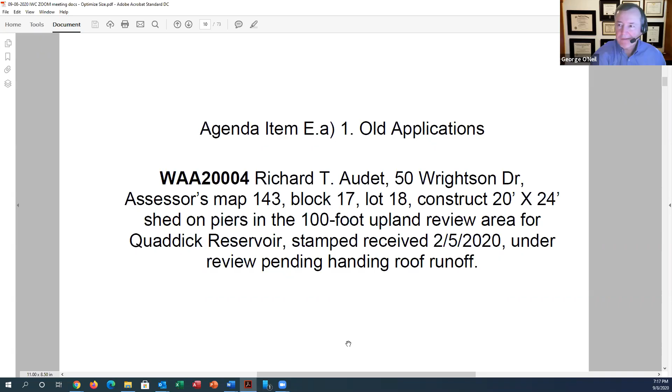So Mr. Audet did get his NDDH approval, and he's been working on getting the roof runoff handled. Just today, he submitted some details about an articulating concrete block for use to keep the top of slope stable. He sent me some photographs today also. These, of course, are not shared with you. I expect that once he modifies the plan to show where he wants to put this articulating concrete block, then I'll move forward with approving the application. But I don't have his revised drawing yet. So I'm waiting for a revised drawing for handling of the roof runoff. I see. Any further action required then? No, not at this time. All right, moving on to the next item.

We have WA 20009, Hallett, Merrick, Plum Road, Assessors Map 85, Block 52, Lot 12, construction of a single-family home, septic system, and portion of a home proposed in the 100-foot upland review area, stamped received on 4/13/2020, under review pending receipt of additional information.

This application is being handled by Bruce Woodis of KWP. I believe he has been on the screen; I see that he had logged in. He's working on developing a revised plan and expects that it will be submitted in the next week or so. Once I have that additional information, I'll be able to determine if I can issue a wetlands agent approval on that. I see. So I'm still awaiting a revised plan.

Okay, no further comments on that? Moving on. Am I out of order here? That's 9. Okay. Yes, you are. Okay, now we're up. Which one? To be on James Jasmine. That's it, right there. All right.

So the next item is item 3, IWA 20011, James Jasmine, 518 Brady Hill Road, Assessors Map 143, Block 16, Lot 37. An after the fact application for partial demolition of retaining wall and construction of a new retaining wall and Quaddick Reservoir. Stamp received on 5/6/2020, statutorily received on 5/14/2020. What do we have on that?

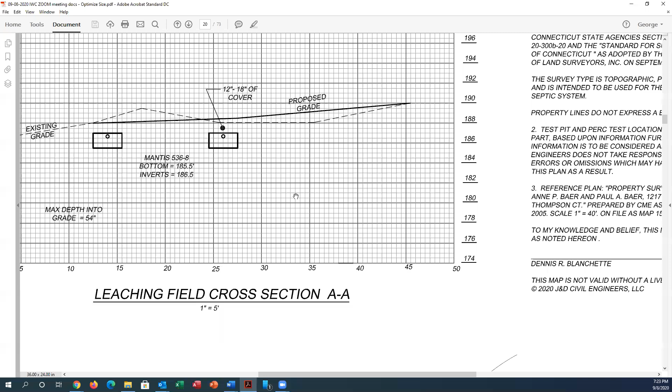Okay, I would like to preface this that there was a letter sent out on August 21st to Daniel Blanchette identifying a number of issues that I had. There's a copy that was sent on the Zoom documents. Subsequent to that, I received electronic versions of revised plans dated revised September 1st. The hard copy of those plans was received on September 4th. So the electronic version that you see of the plans is what I received electronically from Daniel Blanchette, and they appear to be the same as what I received in hard copy.

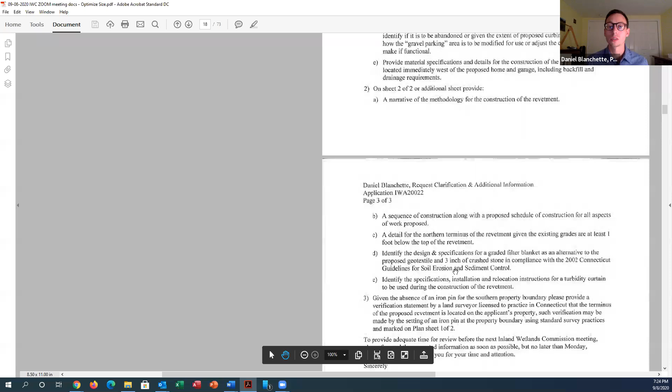All right, we have that displayed on the screen. Maybe the easiest thing would be for Mr. Blanchette to go down through the request for clarification and additional information line by line, and just to verify what changes he made to the plan so that you are aware of what those changes were. Okay, Mr. Blanchette, are you available on the call? Yes, I am. All right, so perhaps for the record, if you would state your qualifications, your role here, and maybe you can address the questions that the wetlands agent posed.

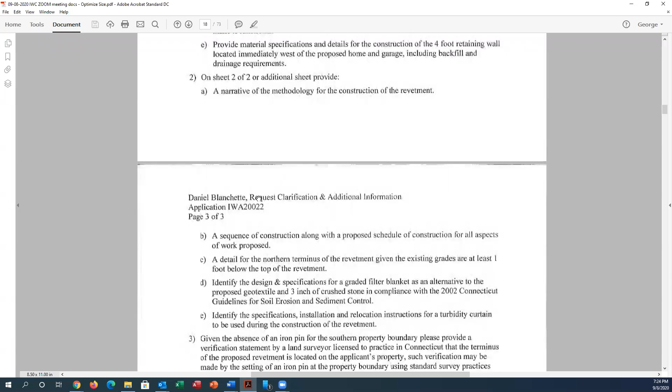Of course. Good evening, everyone. My name is Daniel Blanchette. I'm a professional engineer in the state of Connecticut. I work with J&D Civil Engineers out of Thompson, and I'm here on behalf of my client, Mark Baer. So just to run through the letter that's before you with some of Marlon's questions or suggestions. 1A, we have identified the limits of land disturbance. On the first sheet, there's a dashed line that kind of shows the extent of the grading.

If you're not speaking, please mute your mic, because we're getting a lot of feed over here. Thank you. I'm sorry, Mr. Blanchette. Please proceed. Thank you.

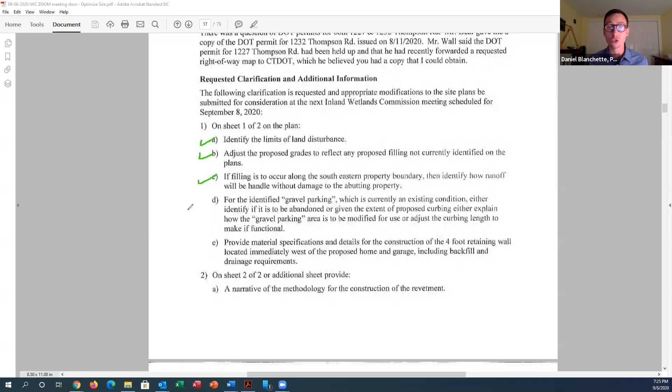1B, adjust the proposed grades to reflect any proposed filling not currently identified. I did address this. This is, I think, in response to the southern border of the property. The homeowner intended to do a little bit of grading that I wasn't aware of previously, so now we're showing that on our plan. So that leads into 1C, actually. Again, doing a little bit of grading and filling along the southern border. I don't expect the drainage patterns to change from what's currently there. A large portion of the southern boundary has kind of a steep natural swale, or a little valley, and so we'll be filling that a little bit, but there still will be a subtle swale there. So that should prevent any runoff from entering the neighbor's property.

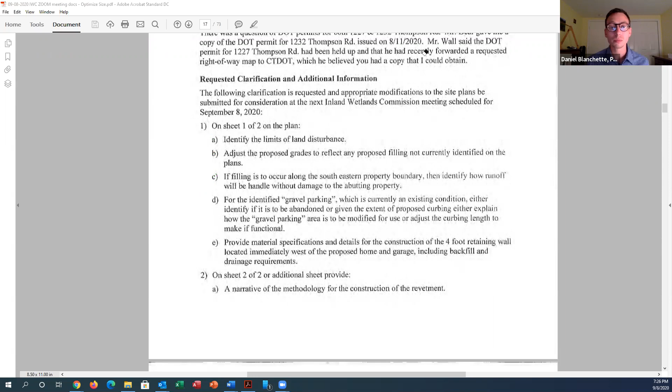I almost feel I should jump down to your notes here, right? Is this where you're referring to? Yep, exactly, kind of in the lower right corner. A little more to the right. Yeah, right there. So you can see there's a natural depression there. We're gonna raise that a little bit, but there still will be a depression. Okay.

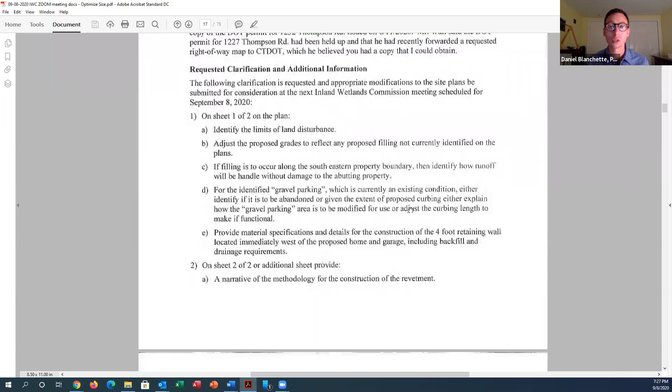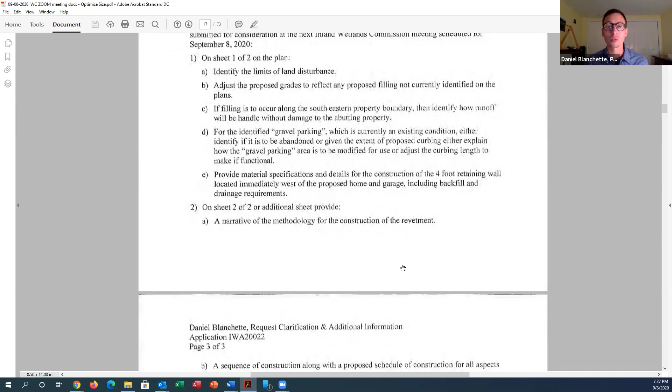1D, for the identified gravel parking, identify it as to be abandoned or modify the curb. We do want to keep that gravel parking area, so I pulled the curb line back a little bit. Otherwise, it's going to be left alone. 1E, a detail for the retaining wall. That's shown on sheet 2 of my site plans. All the retaining walls will be substantially similar. They're constructed from what's commonly called mafia blocks. They're large 2-foot by 2-foot square concrete blocks that have a groove on the top to lock together. So we'll be having 2 courses of that for the retaining wall. There will be a perforated pipe behind it to provide drainage. And again, a detail is shown on sheet 2.

We should almost have a side-by-side on these things, but we aren't there yet. Or we can do it on some platforms, not on this one. All right. A lot of scrolling, I know.

Okay, where are we here? The mafia block is right there, yep. Got it. Right there, just uphill of the house. And then if you keep scrolling down to the second sheet, you can see a detail a little bit up and right. There it is, concrete block retaining wall detail.

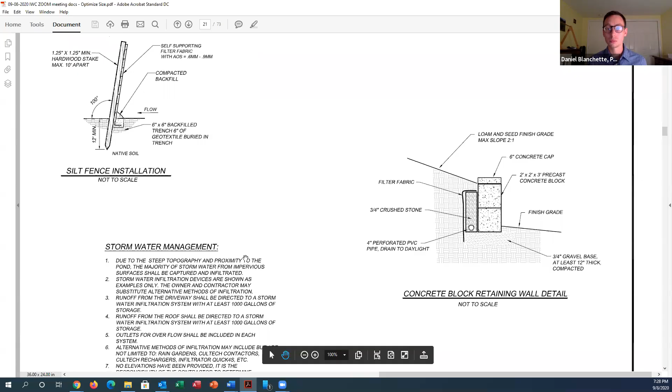So just to clarify, Daniel, there are actually 3 concrete block retaining walls. One is to the west of the house, and 2 are to the east of the house on the pond side of the house. And the purpose of those retaining walls are what, Daniel? The purpose is to prevent erosion and to make the lawn a little bit flatter and more user-friendly for my client. While we're on that topic, if you want to scroll up a little bit to my larger cross section.

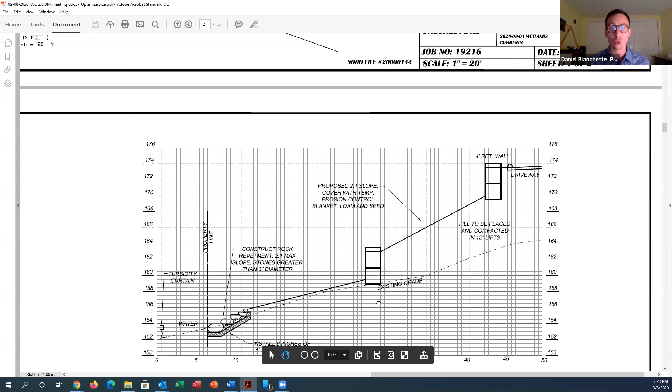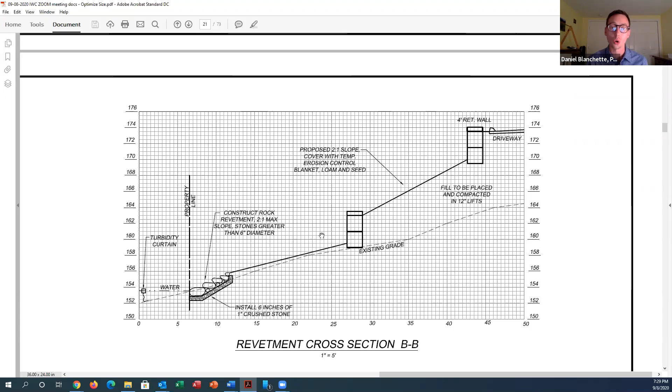Is that it? Yep, that's it. Now previously we were proposing a continuous 2-to-1 slope from the driveway down to the water. There was a lot of fill. And now this second retaining wall that we've added closer to the water allows us to leave the shoreline largely unchanged. There's very little filling or modifications to the first 15, 18 feet along the shore. You can see there's only a few inches of fill proposed, basically just to level it out and provide a nice lawn surface.

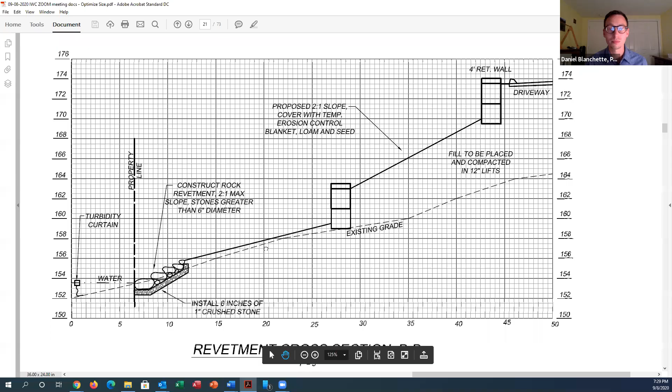Okay. And then afterwards, the second tier is a little bit steeper and requires a couple feet of fill. All right. Are there other points on your checklist there, or did we cover them all? Nope, I'll continue. Stay on this sheet, please, if you don't mind.

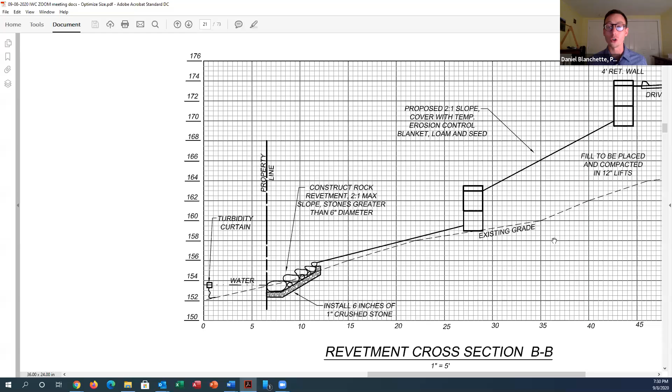Certainly. Marla's next comment was to provide a narrative of the methodology for the construction of the revetment, which is also provided if you scroll to the left a little bit. I have some notes talking about how that's going to be built. We're going to start at the north end of the property and work our way south. We're going to try and construct this in sections about 50 feet at a time, a couple 50-foot sections.

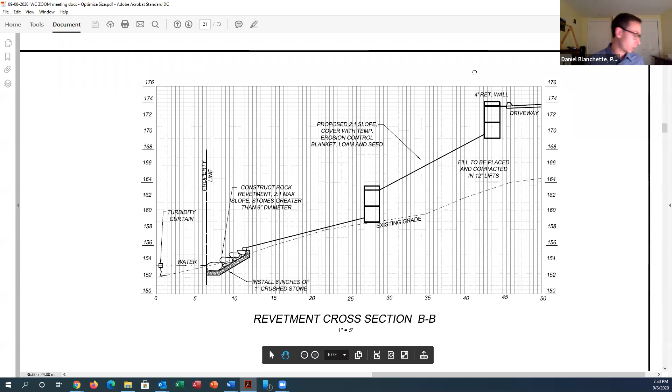And on the larger, nope, sorry, it's on the second sheet. Second sheet. Is this the second sheet? That's first sheet, sorry. Okay, let me go to the second. Yep, right there, up, left. Right here, left? Left. There it is, further left. Construction sequence for revetment. Oh, there you go.

Okay, got it. So I spoke with the contractor at length. I think we came up with a strategy that works. And that also kind of leads into the next comment, which was a sequence of construction for all aspects of the project, which is provided just below. It talks in general terms about how the project will proceed.

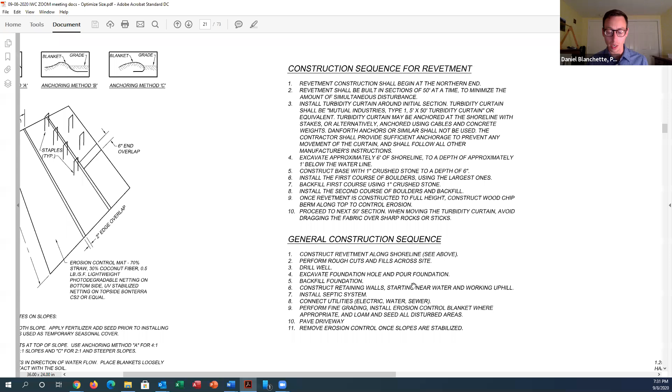The next comment: identify the design and specifications for a graded filter blanket as an alternative to the proposed geotextile used on the revetment. So again, if you could scroll back to the revetment cross section. Previously, we were proposing 3 inches of crushed stone along with a filter blanket or a geotextile fabric. In speaking with Marla and the contractor, they feel that due to the size of the stones that we're placing, the geotextile could get torn.

So what we've decided as an alternative is to double up the crushed stone and get rid of the geotextile. So now we're proposing 6 inches of 1-inch crushed stone as a bed for the larger blocks that will compose the revetment. Next comment,

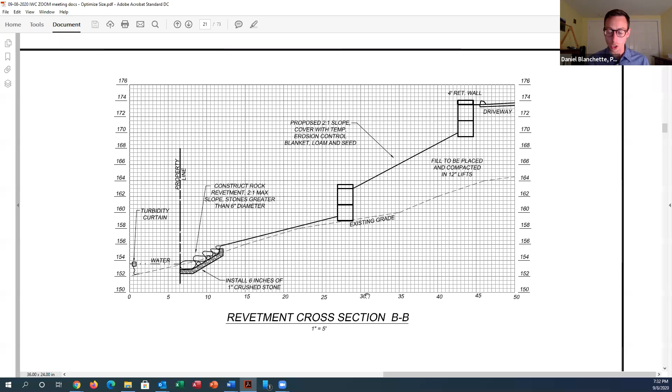2E has to do with the specifications, installation, and relocation instructions for a turbidity curtain to be used out in the water. Previously, we had proposed either some staked straw wattles or straw hay bales, but due to how rocky the bed of the lake is at that location, we felt that stakes would have a tough time really working. What we're proposing instead is a turbidity curtain.

If you're familiar, it's basically a float, a cylindrical or square float that floats on the top of the water, and there's a blanket or a fabric that hangs down into the bed of the lake that prevents any kind of silt or erosion from contaminating the larger water body. So we will have this turbidity curtain. I sent a specification to Marla for the type of turbidity curtain, the manufacturer.

It's a standard type 1 turbidity curtain, which is what's commonly used for water with low velocities. So it's not something you'd use on a river or on the ocean, but for this use, it should be sufficient. And then again, going back to the notes on the revetment construction, that has notes built in about the type of turbidity curtain, how to provide anchorage to the shoreline, how to move it, etc.

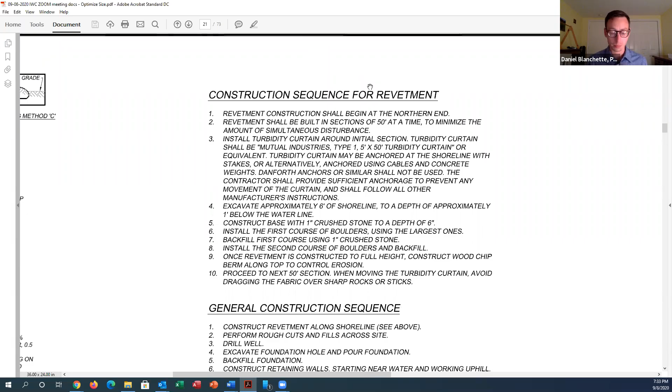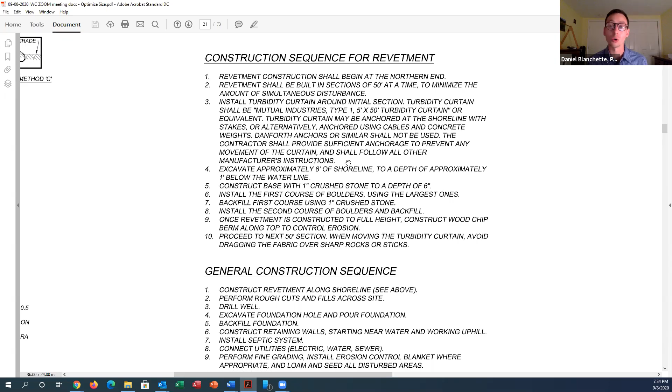Coming down to, I believe, Marla's last comment, number 3, there was a concern that the contractor might not know where the property line is and could encroach onto the neighbor's property. I explained to Ms. Butts that there is an existing fence that's right on the property line within an inch or 2. And so I think that's sufficient monumentation to prevent any encroachment onto the neighbor's property.

I believe that's all of Marla's comments, and I have addressed them. Thank you. Just a last point, I'll add that we did receive our NDDH approval. That letter was given on September 1st.

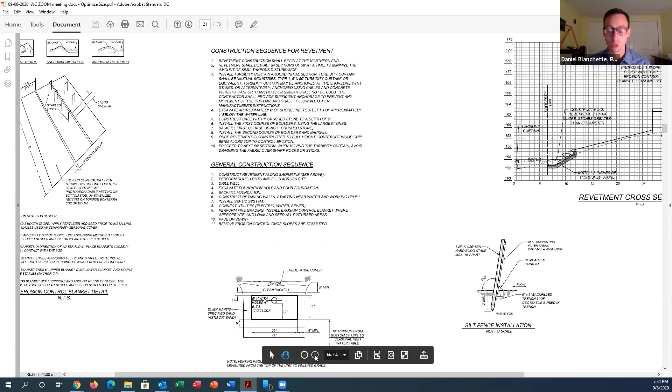Okay. Ms. Butts, is there anything else that needs to be addressed? So virtually everything that I had on my list was addressed. The only thing that I would come up with is if you go back to sheet 1, where you can see the revetment and the retaining wall. The revetment, according to the sequence, gets constructed first.

And then they talk about excavating for the foundation and then building the retaining walls after the foundation is excavated out for the house. The only thing that, in looking at it now tonight, I see that probably should have been added was once the revetment is completely constructed, a silt fence should be installed at the uphill side of the revetment, because the rest of the site is going to be potentially disturbed and could drain down into the lake over the revetment. Although it would have to go through the revetment.

Go ahead, Daniel. Sorry, I didn't mean to interrupt you there. I can address that. And actually, if you look, I have a note specifying that a wood chip berm is to be constructed at the top of the revetment. This was a suggestion by the contractor as kind of a free, environmentally friendly way to prevent any erosion. So that's what we were specifying in terms of silt fence, but we did have some erosion control in place.

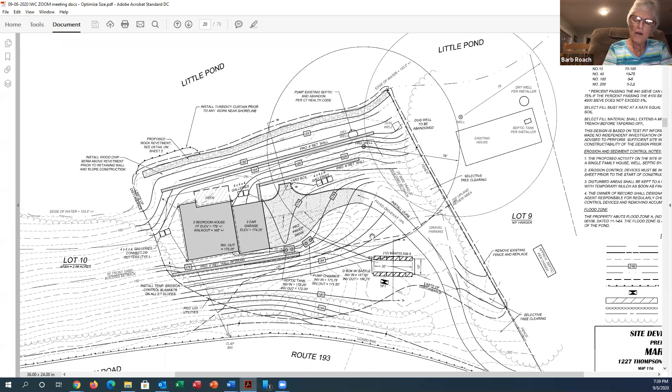So there were a number of questions and concerns during our last commission meeting on this application. Do any of the commissioners have questions of Mr. Blanchette or of Marla regarding the Mark Bears application? Barbara Roach here. I have a couple questions. Sure. Firstly, how far will the turbidity curtain go into the pond from the water's edge? It may say it in the instructions, but it's kind of small and I couldn't see if it did.

So the turbidity curtain that we're specifying is 5 feet in height, so it can be installed at a depth of up to 5 feet. I suspect the contractor, for convenience, will want to install it at a lesser depth of maybe 2 to 3 feet. 2 to 3 feet in height, or 2 to 3 feet into the water? In height. So maybe 5 or 6 feet into the water. Okay.

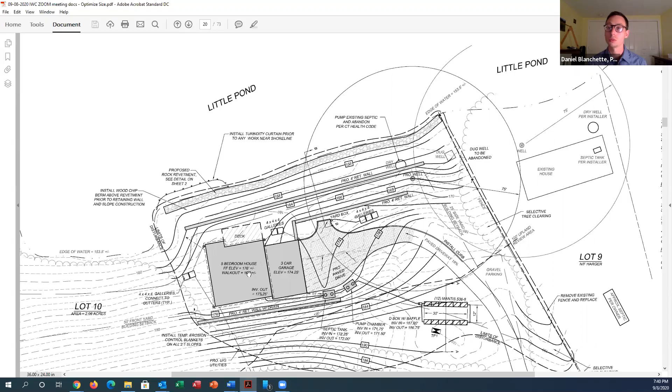Barbara, maybe I can help to understand this. Turbidity curtains typically float; the top of the float sits on the top of the water. The curtain is pretty impervious and sits down, and in this case will probably sit on the bottom, so that if there's any turbidity that's generated that gets into the water, it stays behind the curtain. And then once the work is done and the water settles out, the curtain is moved to the next location where there's going to be some disturbance and turbidity.

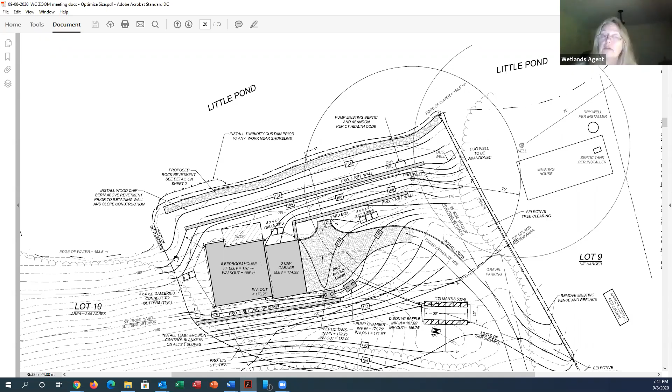It's intended to keep the sediment close to the site of construction and not allow it to go farther into the lake. It's not to say that there won't be any sediment that enters into the near shoreline. It just controls it and keeps it very close to the shoreline and not migrate out into the rest of the water body. Okay, Barbara Roach. So we could expect 5 to 6 feet of sediment from the edge of the shoreline into the pond till it gets to the turbidity curtain, correct? Correct. Am I getting that? Okay, yes.

I'd like a point of clarification. Charlie Obert here. What I just heard Commissioner Roach say, 5 to 6 feet of sediment, but is it actually a fairly thin film of sediment that may be up to 5 feet away from the shoreline and below the surface of the water, but it's not going to be 5 feet deep, is it? No, no, it'll just be a thin layer of sediment that's naturally disturbed from excavating the shoreline. There won't be fill per se in the lake. Okay, that's what I thought. Thank you.

Barbara Roach, one more question, Daniel. Will additional rocks be required? There are a lot there now. Will more need to be brought in? I'm sorry, the rocks for the revetment? I'm not sure if they need to bring more rocks on site, I'm sorry. Okay, thank you.

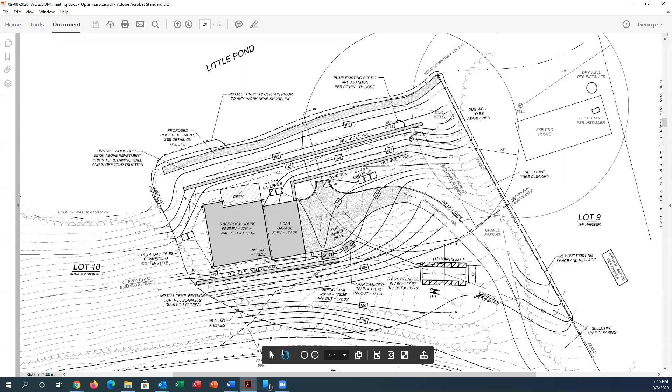All those in favor of approving the application, please signify by saying aye. Aye. Aye. Aye. All those that are opposed? All right, there is no opposition. The application IWA 2002 with the qualifiers has passed and the permit's approved. Thank you, everyone.

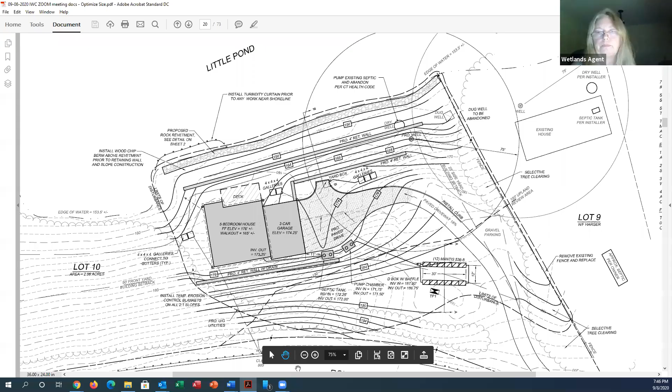Thanks, Dan. Just for the applicant's information, I will draft up the permit for George's signature. Once George signs it, it will be mailed out by certified mail to the applicant with copies going to the appropriate entities. Thank you, Marla. Moving on to the next application.

NDDH approval. All right, the next item. There are two items here from the same site. So should we look at them in total, or should we just read one and modify it? But it's IWA 20023, Thomas Murray, 0 Sandam Road, Assessors Map 114, Block 24, Lot 60B. Discharge of footing drain associated with the construction of new single-family homes, stamped received on 6/18/2020, under review pending receipt

of additional information. This is an old application, and would it be inappropriate to include both of these? I'd like to just say ditto. It would be appropriate. They are two adjoining lots. Right, so the comments that I have on both of them are the same.

Right. So there's also lot 60C, the same essential elements, to construct a single-family home, driveway and footing drain, portions of which are located in the 100-foot upland review area, stamped received on 6/18/2020, under review and pending receipt of additional information. So those are the two items on Sandam Road for Mr. Thomas Murray. So where do we stand on this one?

Or these two? We got a letter, well, actually, the engineer, Bruce Woodis, got a letter from the Natural Diversity Database dated July 26th. And in that, they stated that they reviewed their database files and the maps that he supplied for the two homes. And according to their records, they have a significant natural community identified as a poor fen and multiple state endangered and threatened species just downstream of this property.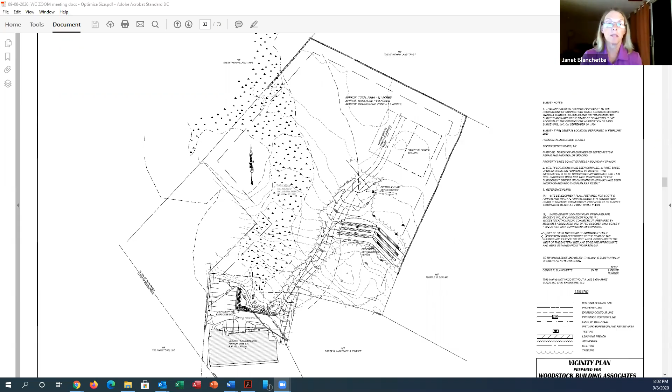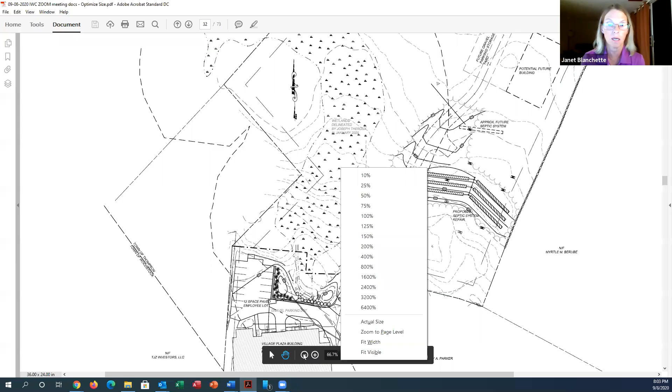Yes, so this sheet pretty much shows the whole property. You're probably all aware of the Village Plaza on Route 131, 171. Woodstock Building Associates is renovating the whole plaza to move their headquarters there. Right through the middle of the property, flowing from north to south, is an intermittent stream that is culverted under their back parking lot. And the whole back parking lot today is gravel. And there is a septic system for the plaza back there, which was failing. So essentially this is a whole renovation project.

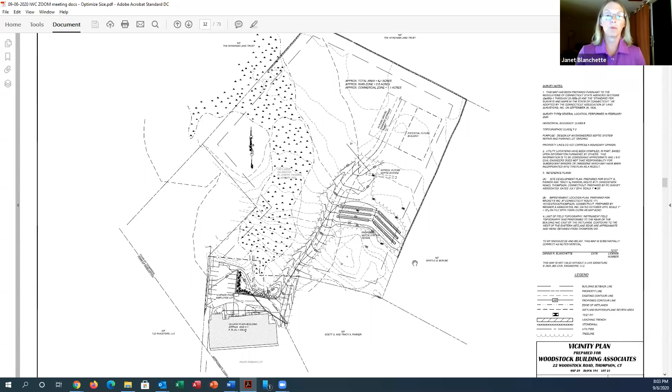Perhaps if you could go to the next sheet, page 33, Mr. Chairman. Yes, so this is a blow up, just larger scale of the area behind the building. There'll be a driveway constructed to the north with a new pumped repair septic system. And you can see there's a dashed line, right where your little hand is, which represents the 100-foot upland review area, correct. And above that to the north is where the repaired septic system will go. That's correct.

Basically the whole back parking area is within the 100-foot upland review area, and it's currently uneven gravel. So to create an attractive and safe parking lot for the employees, they would like to pave that. The drainage for that paved parking lot, and for the rooftop runoff from the building, will all flow into rain gardens or stormwater infiltration basins. So there won't be any direct discharges to that wetland or the downstream water course.

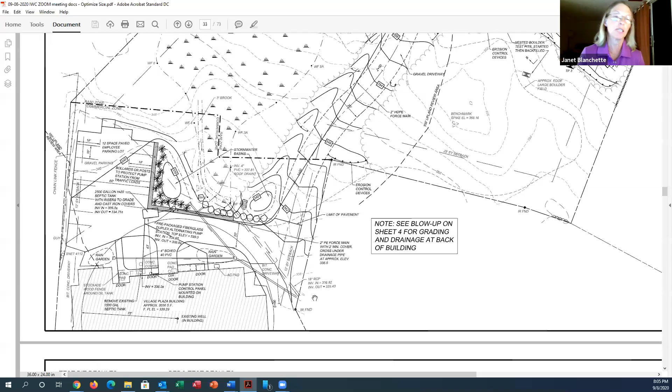The first option will be the infiltration through the low impact development features. And then as they fill up, there'll be overflow catch basins in each one of them that will flow. Yep, those are the stormwater infiltration basins, and lower down you can see two rain gardens that will take the roof leaders. And those will be piped to the outlet end of the existing 18-inch RCP. So technically on this application, there isn't work within the wetland, but clearly the work is going pretty much right up to the edge of the wetland in the vicinity of the parking lot.

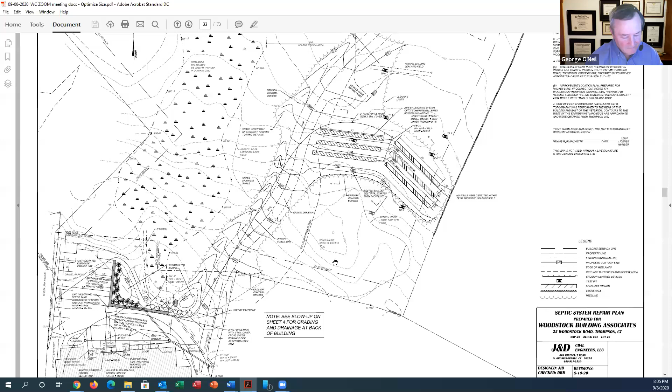So for the commission's benefit, the features that have been placed in to manage the stormwater that were seen on sheet 2, which is page 33 of the Zoom documents, are actually a significant improvement over what is currently there. The reason why the application is before you and not before me is because at last month's meeting, we converted it into an individual permit due to the direct discharge into the intermittent watercourse from the stormwater management system, where the discharge is at the outlet of the existing culvert.

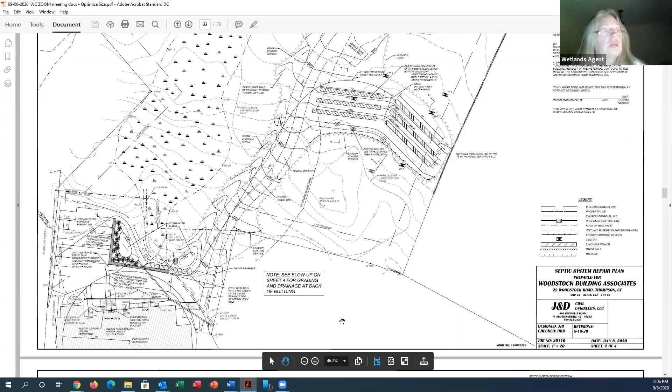And you can see that in the lower central portion of, where your hand is moved to the left. Yeah, I'm trying to make it larger. How's that? My screen works a lot slower than you guys.

In any case, all of the erosion and sediment controls that were identified on here should actually improve the runoff coming from this site. And the fact that they have a relocated septic system will also be of benefit because the existing septic system is not adequate. So there was nothing in this application that would warrant a denial. In fact, I think the design is very good.

If you have any interest in looking at stormwater management basins, there are some at the YMCA in Putnam that would work somewhat similar to the 2 infiltration basins that she has here. The rain gardens have been promoted for managing roof runoff for some time now. So I would have no objection to the commission approving the application as applied for without additional conditions other than the standard conditions that go on every permit. Thank you, Ms. Butts. Commissioners, questions?

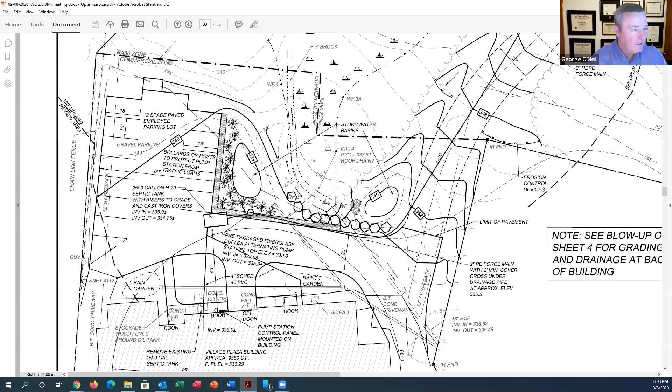Well, for the record, it sounds like our wetlands agent feels it's an improvement over the existing structures, and obviously there's a lot of engineering that's gone into this, from what Ms. Blanchette's commented on, that it's improved the area. So do we need a motion to advance this? Yes. I make a motion that we approve application IWA 20026 for WBA Real Estate LLC, Woodstock Road, Assessors Map 29, Block 104, Lot 21. Repair the septic system and parking improvements.

Okay, we have a motion. Do we have a second? Second that motion. Okay, we have a motion made and seconded. Discussion? Comments? I'll observe that it seems very well thought out, and if it's going to improve the wetlands, then that's a step in the right direction. All right, no further discussion. All those in favor, say aye. Aye. Aye. Aye. Any opposed? Hearing no opposition, the motion is carried. Permit IWA 20026 is approved. Thank you. You're welcome.

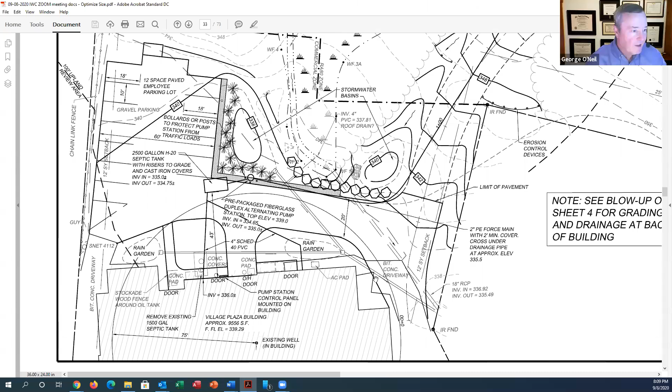Let's move on to the next application. There's a lot more stuff here. All right. So I've got WAA 20027, Richard and Lynn Skronowski, 21 Richard Bennett Lane, Assessors Map 137, Block 7, Lot 5. Construct in-ground pool, shed, and driveway paving in the 100-foot upland review area, stamped received on 7/14/2020, approved 8/3/2020, legal notice published on 8/28/2020. Appeal period ends on 9/11/2020. Is there any further action required on this? No. Nothing.

All right. So now we have 3 items here. It appears to be on the same block, block 31. Are these to be read together, or are they all separate and distinct items? They are part of the Madison Avenue subdivision, and they are distinct separate applications. The first two for subdivision lot number 5 and lot number 6 have both been approved, legal notice published. They also have an expiration date of 9/11/2020. The third, Madison Avenue Investments LLC, is subdivision lot number 11, and that is under review.

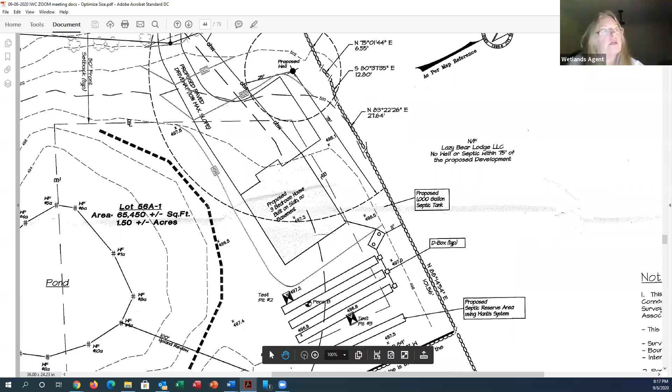So there is a drawing that I gave you on the next page showing the property. The land to the south of this was Carol Weiss, Kenneth Weiss's mother. They replaced a septic system. And I believe this is also a site that Charlie Aubert and I passed by, and we noted that the 2 ponds that were on the Weiss's property were very low. They have no water that comes into them other than rainwater, so they're a reflection of the groundwater table.

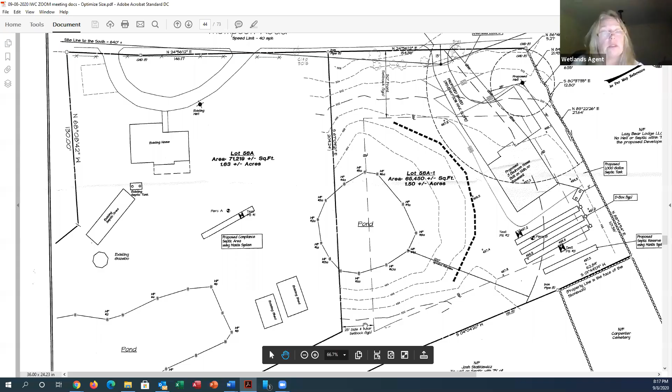And so that's why I rendered a decision to approve that. I don't see any effect that it would have on that isolated ponded area. And it's not a vernal pool because it still has water in it now. Vernal pools typically this time of year would not have any water in them.

But, any questions? So that one's just waiting for the legal notice to be published. All right, any applications received after the agenda was published? Looks like we do have one. Is this it? We have 2. We have 2. Okay, whoops. Well, we'll start with the first one.

DEC 20036, Town of Thompson, Sand Dam Road at 5 Mile River, Cross Culvert, Assessors Map 133, Block 24, no lot number. Replace existing beaver deceiver with a new deceiver consisting of a culvert protective fence for non-regulated use, conservation of wildlife, stamped received on 9/4/2020. That's one. And I guess should they be read together or are these separate? No, this one first. Okay.

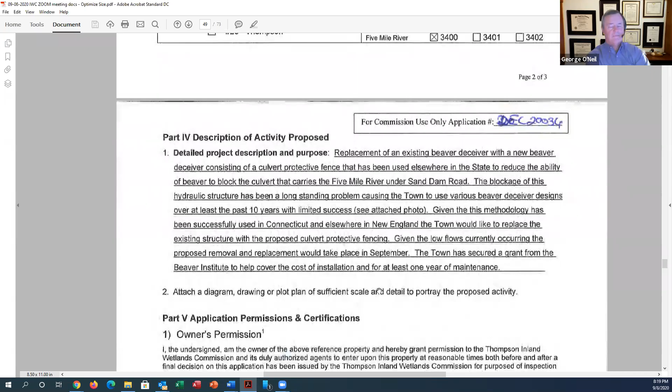If you scroll to page 49, it provides a description. I see it. Okay, page 49, it's up there now. Yep. A detailed project description. And Mike Callahan, who will be the installer of the culvert protective fence, is available to answer questions for you.

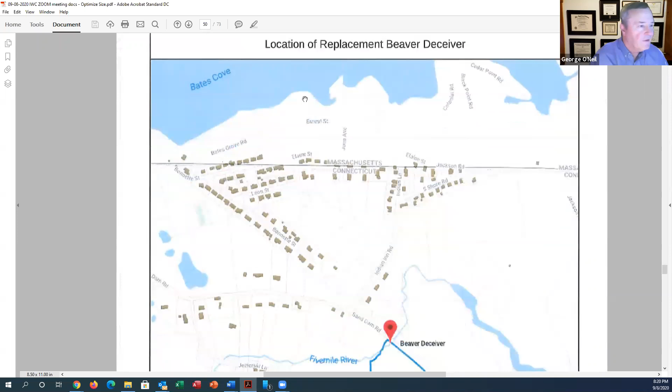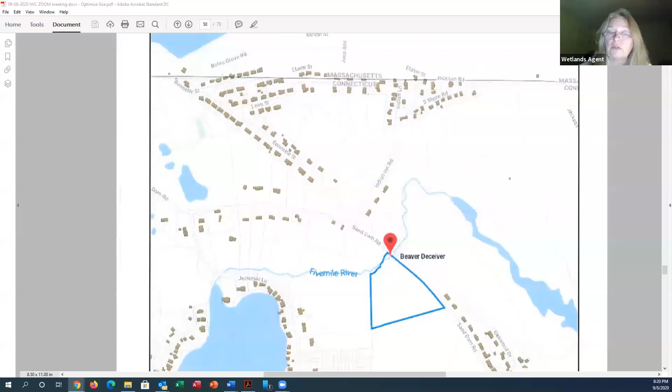But I would suggest that before we have him speak, scroll down now to page 50. It gives you the location of the culvert on Sand Dam Road. Now, if you recall, we were talking about Murray's property, the 2 lots that the NDDB, the Natural Diversity Database, is concerned with. They are located immediately to the northwest of that flag where it says Beaver Deceiver.

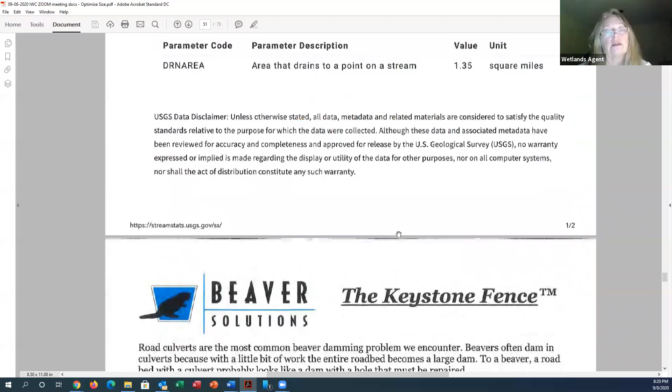And Mr. Callahan provided documentation to the town, which includes a stream stats report. And if you scroll down, you will see that the contributing drainage area is over a square mile. I see. That's the drainage area in yellow. Right. And if you scroll down to the next page, 52, you'll see the design of the beaver deceiver that's being proposed to be installed at the direction of the town by Mr. Callahan.

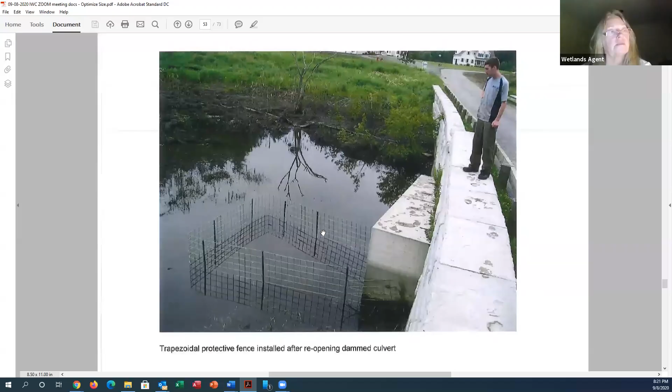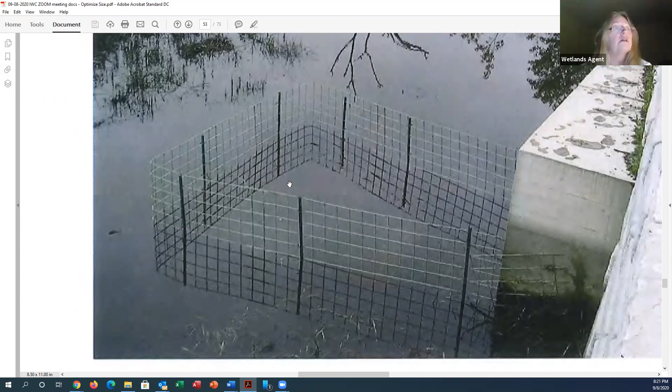And then if you scroll to the next page down to 53, you'll see a picture of what that exclusion fencing looks like. Now, the alternative to having a deceiver of any type for beavers is to basically kill the beavers, trap them out, shoot them, whatever. And so this application for a ruling came in because they're trying to conserve the wildlife. They're trying not to have to kill the beavers. And in order to save the beavers, they've got to do something else.

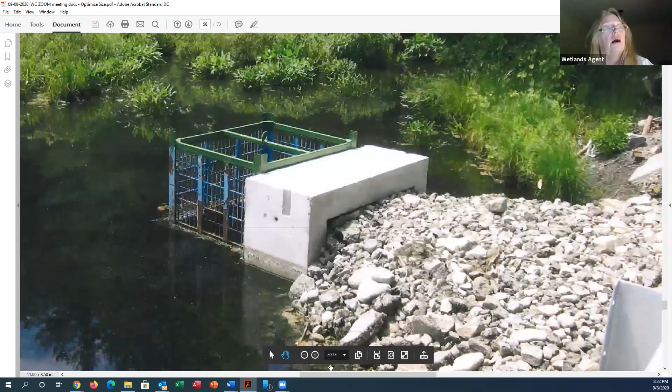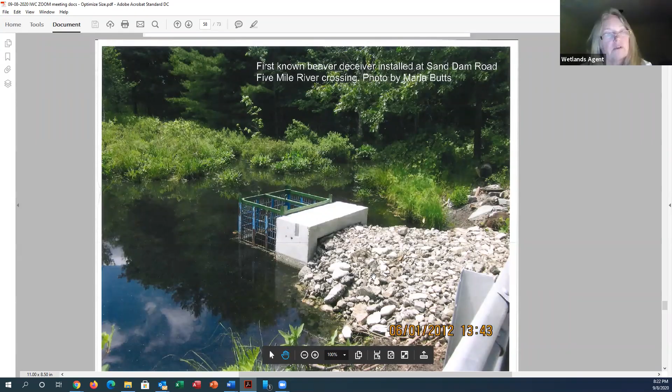And so initially, I raised questions and concerns about the structural stability of the fence, and that's why I got in contact with Mr. Callahan. And if you scroll down to page 58, there's a photograph of the first deceiver that I'm aware of that was put in to the bridge when it was a bridge by a former Public Works Director. Your screen is too big to see it. That, by the way, is the wetland that she called a poor fen, and that's not a poor fen. That's because in the background of this photograph is the Murray property that we were talking about earlier.

All right, the next picture. That did not work because the beavers just collected all the sediment on the grate that was surrounding the culvert inlet. So then they went to a different kind of deceiver, a leveler. I'm not sure exactly what the formal name is, but still the beavers would clog the bridge. So they put in screening by the bridge as well as had the deceiver, and the screening still got clogged. So it became problematic from a maintenance standpoint. And there's a close-up in the next picture, number 59, showing what it looked like at the old bridge.

Well, now that there's a new culvert there, that's it. That's correct. Okay. Now that there's a new culvert there, the design has to be something a little different, and it's still been problematic because this water, if it gets blocked here, it affects everybody on Little Pond. And so it becomes very important for the town to be able to maintain the free flow of water through the culverts that have been newly installed. And at this point, I'm going to turn this over to you, Mr. Callahan, so you can explain how this fencing goes in and what the size of it would be at this location, so that the commission can understand how you intend to install it.

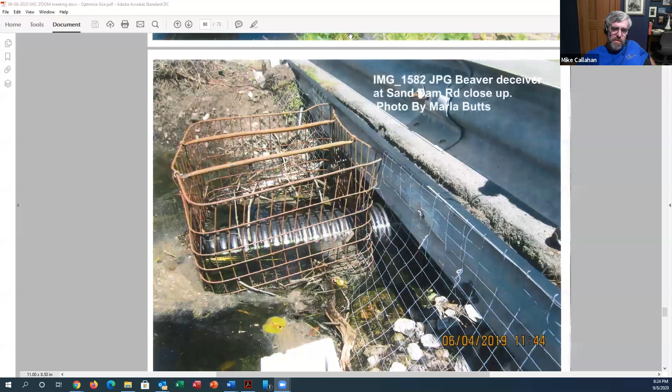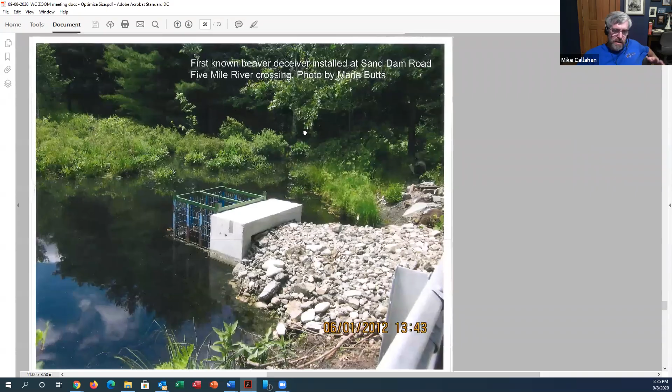The fence that Marla was describing is designed in a way to discourage beavers from damming on it. Beavers are cued into plugging moving water, and culverts are the most common problem we see because if they plug the culvert, the entire roadbed becomes a dam. So they're very motivated to do that. So what this fence does is instead of a 2, 3, 4-foot culvert that they have to plug up, the fence creates a long perimeter.

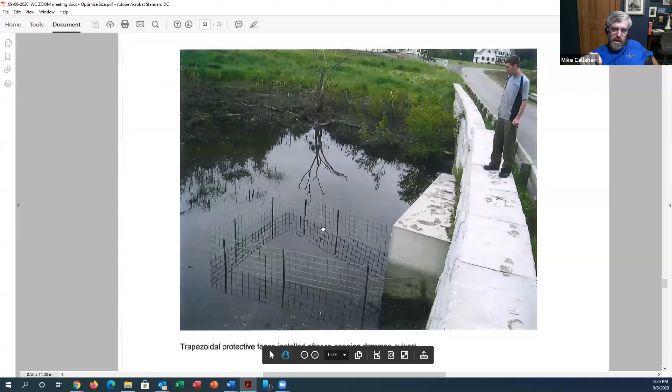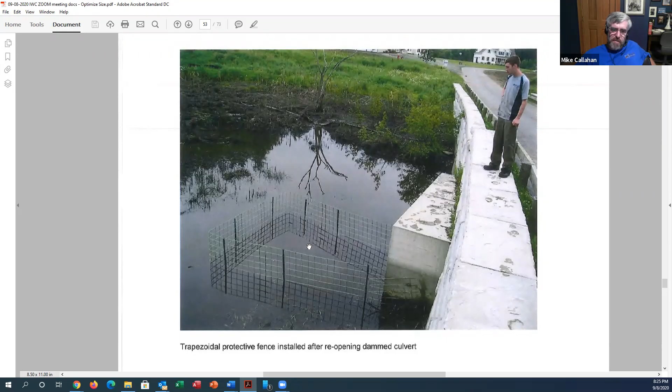Typically, the side walls are at least 12 feet long, and that's about what they would be in this site. And that far wall would be about 8 feet wide. And it works in 3 ways. One is, you have now for like 40 feet, the beavers have to dam around instead of a few feet. So that discourages them, and it turns what was the easiest place for them to make a dam into the hardest. It won't stop them from damming elsewhere, and that could be a problem down the road.

But the goal for the fence is to keep the culvert open, keep water flowing through it normally without any elevation of the water from what the culvert design was. So they work very well, but in our experience, I've put in over 1,700 devices, primarily in Massachusetts, but some in Connecticut. And these fences have about a 96% success rate with the beavers there.

They do require about an hour worth of cleaning per year, because you can't let leaves and sticks float up against it and build up, or the beavers will dam on it. But it's a very effective way to discourage beavers from plugging culverts. Interesting. Commissioners, questions of Mr. Callahan?

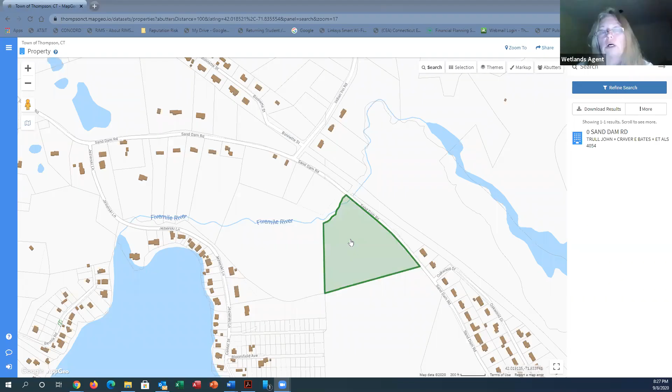This is Charlie Obert. I have a quick question. At the location where this new device will go in, there's an old railroad right-of-way. Am I correct that the property on the downstream side of that right-of-way is currently Wyndham Land Trust property? Or is George, that? I'll answer that. George, I don't know. It becomes irrelevant to this application because this is the town's activity. And Jerry's Swamp, some of it is owned by the Wyndham Land Trust, but I don't know if the piece that's immediately next to the old trolley track is the Wyndham Land Trust.

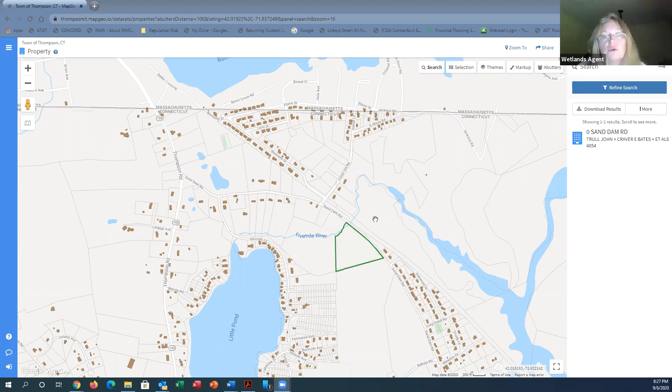I can double check real quick online. I'll go to MapGeo. I've got MapGeo up right now. I have that up. So am I at the right location? That's the correct location, yes, but go on the other side, go to the northeast where you see Jerry's Swamp. Click there, right there. Okay. That's what he's asking, is that Wyndham Land Trust on the other side? Yes. There's a strip. Is that the town's property in between? I guess it is, yeah.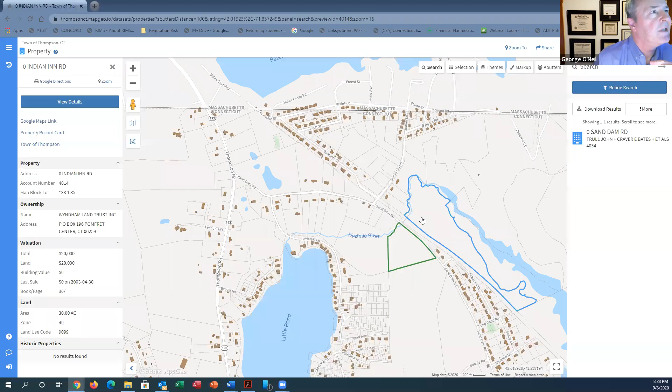That's questionable. That was the old railroad right-of-way, and it's questionable who owns that right now. A little down to the right of that image, it's owned by the Butlers, who own a farm called Morning Beckons Farm. And that exact stretch of right-of-way is questionable. Okay. So this would correct the beaver deceiver that was put in by the previous DPW director? Yes, it would replace that. That's correct. Okay, thanks.

So I'll go back to the original. Yeah, I'll go back to this one. This application is a request for a ruling that it is a non-regulated use for conservation, soil, water, and wildlife. And the application was made by the first select woman, Amy St. Onge. And because low flows are now, they would like to get the deceiver in very soon. In addition, the first select woman was able to obtain a grant for a couple $1,000s to help pay for the cost. And it has become a problem.

The beaver problems have given quite a bit of headaches to the Public Works Director. So the town staff is on board with trying this attempt because the other attempts have not worked the way they want them. I would recommend approval of this as a non-regulated use. That's a recommendation. We heard from our subject matter experts, Mr. Callahan, and our inland wetlands agent.

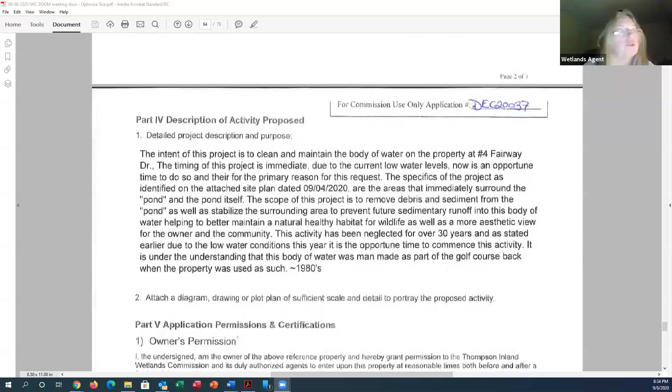I don't see him still in the Zoom meeting. What had happened is I had received a complaint that somebody was throwing things into a pond at 4 Fairway Drive. I went out, took a look. I took some photographs. There is a photograph of the pond on page 66. What I found was that because of the low flows and the drought conditions that we've had, the pond level dropped. It's a man-made pond. The reason it's called Fairway Drive is because there was going to be a golf course there. And they had made a pond that had a liner in it, and then there was clay on top of the liner. Well, with the really low flow, all the fish died in the pond.

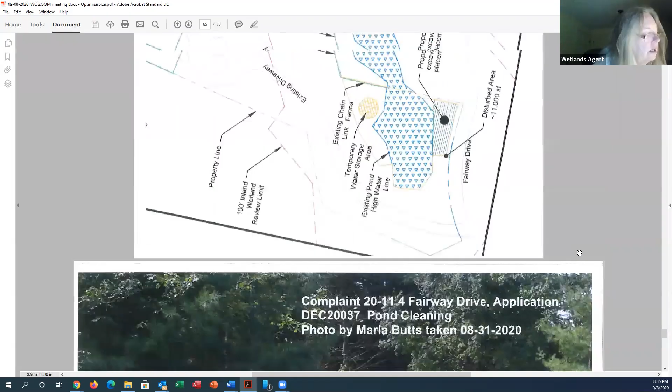And the property owner decided he wanted to clean the pond of accumulated sediments and had gotten started doing that. And then I contacted him and said, well, technically you really can't do that. There are mapped wetlands around the pond, but they're not very extensive. They're on the very edge of the pond. So I asked him to apply for a ruling regarding the pond. And so he did provide the explanation as to what he wanted to do.

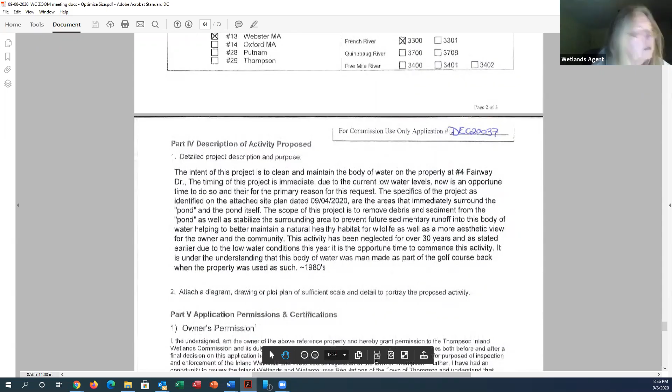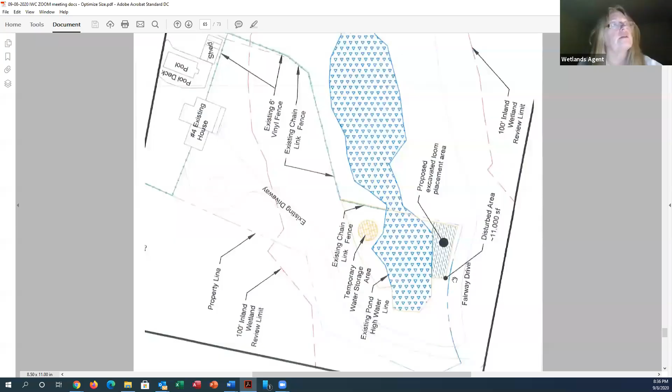And given the fact that the water table is so low right now and that the fish all died in the pond, which has got to give quite a stink, I have seen fish kills before, cleaning the accumulated sediment at this point in time makes sense as long as he does not touch the liner that was originally in the pond, and he said he didn't want to do that. So the only thing that I told him I felt was necessary is that he had to have a place to put the excavated material, which he said he would put between the pond and the street. And that's shown on his drawing, on page 65.

There is no water flowing at this point in time, so if he's going to remove accumulated sediments and the dead fish, it makes a lot of sense that he does that now and not wait for storms to come in. So if the commission granted an approval to clean the accumulated sediments from the pond and side cast them in the uplands, that he be required to complete his work within 30 days, because by that time, the water table will start rebounding.

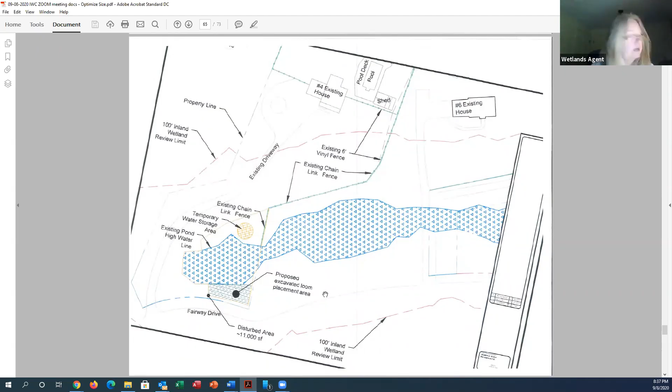So we have a motion made and seconded. Is there any further discussion? All right, no further questions. Then we will vote. All those in favor say aye. Aye. All those opposed? Hearing no opposition, the ayes have it. The application is approved, with the qualifications that were stipulated by Commissioner Obert.

All right, moving on then. We have no other applications, do we? Now we have violations. No. All right. Looks like my agenda is moving on. All right. So permit extensions, there are none.

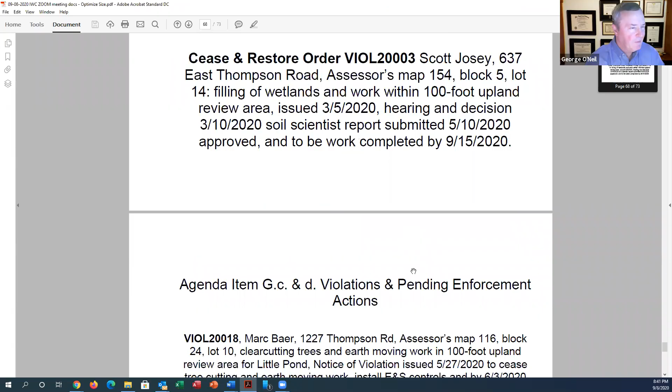I drove by last week and the work was not yet completed. I will attempt to send him another reminder. All right, so no further action. I believe you and I looked at this site? Yes, we did. It looks the same, except there's now grass growing where there had been side casted organic materials. All right, so I guess we compressed them on 2 slides.

We'll start with Marc Baer. Violation 20018, Marc Baer, 1227 Thompson Road, Assessors Map 116, Block 24, Lot 10. Clear cutting trees and earth moving work in 100-foot upland review area for Little Pond. Notice of violation issued on 5/27/2020, to cease tree cutting and earth moving work, install E&S controls, and by 6/3/2020, provide written explanation for work done and schedule for submitting application. Reference application IWA 20022 above.

So, is there anything further? With both of these notices of violation, they are closed with the issuance of the permit that you approved tonight. All right, so that's done. That goes with 19 as well? Correct, because it was confirmed that the tree debris was taken out of the pond. All right, so 18 and 19 have been addressed. So we'll move on.

To the next item. And that is violation 20033, Jennifer Burlingame and Robert Lemieux Jr., 480 Quaddick Town Farm Road, Assessors Map 158, Block 20, Lot 8K, filling, earth moving within 100-foot upland review area and possibly within delineated wetlands. Notice of violation issued on 8/6/2020 to cease any further earth moving work, and by August 20, 2020, provide an explanation for the earth moving work and the reason why an approval was not sought prior to the initiation of work within 100 feet of delineated wetlands.

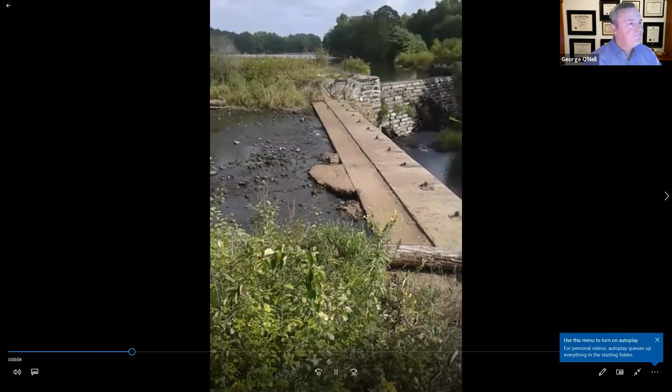Thank you, George. This actually is a video. If you go back to that, George. There it is. Okay. Can anyone see that? Okay, so this is actually a video. My system is really slow. I do have the volume on mine. Am I the only one that can hear it? I cannot hear it. Let me choose something here. If you stop it, I'll just explain what's going on.

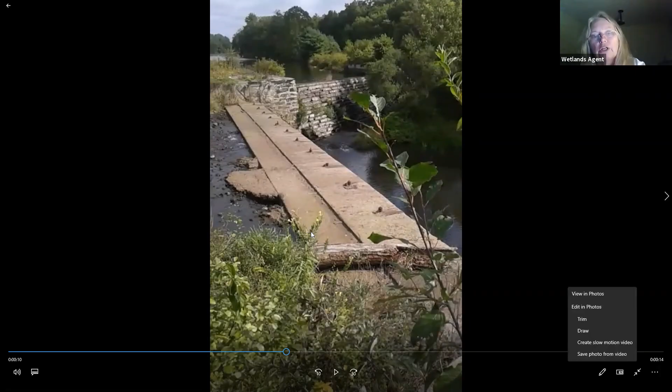Okay, I stopped it. Okay, so you see the concrete that's located behind the concrete spillway? There's two spillways on this. The primary spillway that was supposed to run all the time is the one that's closest to me taking the picture. The spillway in the central portion of the picture is a couple feet higher than the one that's in the foreground of the picture. And I'm not sure what happened. Did I kill it?

So this is where the blue line is the principal spillway. So water should be going over that spillway, but it's not. It's all flowing in behind the concrete lip. Now you can see where historically they had done a concrete patch behind the concrete spillway, and now that has been undermined right where your arrow is. Right. And it's flowing quite substantially underneath that concrete. And then there's another piece farther into the background where there's another hole that's developed.

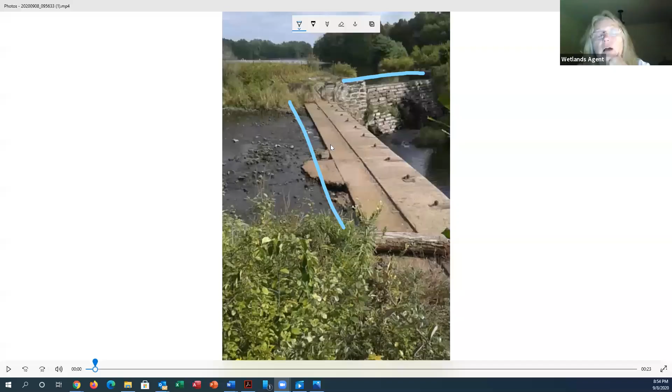Over here, this dam was identified over a year ago by Leonard Engineering as in poor condition, and DEP was supposed to be working with the dam owner regarding its repair. This is a high hazard dam, which means that if the dam were to fail, it would likely cause a loss of life and/or property.

The river at this location has 99 square miles of watershed. And in Massachusetts, there are 2 Army Corps of Engineers flood control structures, but they are not on the main stem of the French River. They are on side water courses to help control the peaks.

We have a very active hurricane season this year, and my concern is that with these holes developing and enlarging, the interior structure of this dam is being weakened, not only at this spillway, but the spillway in the background of the picture. You can see a large wet spot where water has been flowing out for a long time. That's the dark portion in the central part of that spillway in the background.

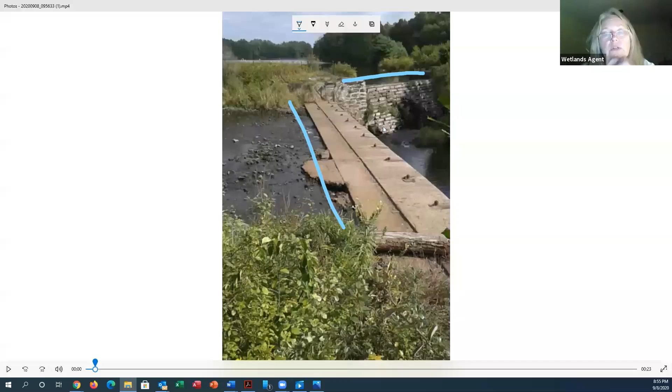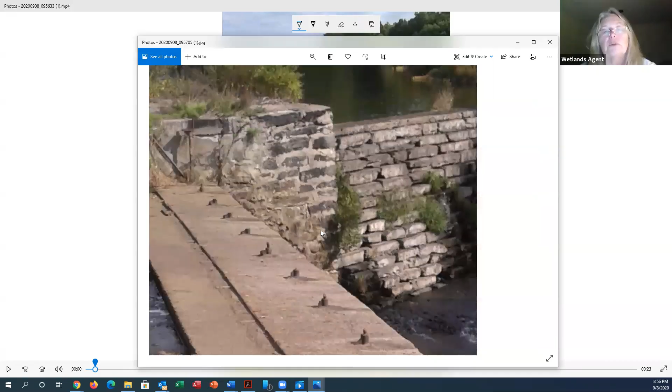A significant amount of water is flowing outside of the structure itself. They haven't identified its structure, but I think it's most likely a timber cribbing dam, which means they built timbers, they filled that cribbing up, and then they put a stone face on it. There you get a very close view of how the water is flowing in.

So I'm really, really concerned, because if this were to fail and create a flood wave, there is an inundation map that Leonard Engineering did in 1996 when the Army Corps of Engineers paid for the investigation of all high hazard dams in Connecticut. And that inundation map shows that 3 Rows, the village in North Grosvenordale, the old housing for the mill, would become inundated. And the houses along Route 12 are also within the path of the inundation area.

In addition to that, to complicate it even more, DOT has done an evaluation of the bridge on Buckley Hill Road and found it to be deficient. So if the dam were to go, could it take out the bridge on Buckley Hill Road and then sweep on down and take out other structures and damage other properties? DEP has had it on their radar screen. I've been talking to them since 2016 about this, could be even earlier, but I don't know what they're doing about this.

So I sent the video and the photographs to them and asked them, as soon as possible, to notify the Wetlands Office, the Thompson First Selectman, Amy St. Onge, and the Emergency Management Director, Steve Benoit, as to the status of the actions DEP and the dam owner have taken to place the dam in a safe condition. And I'm awaiting their reply.